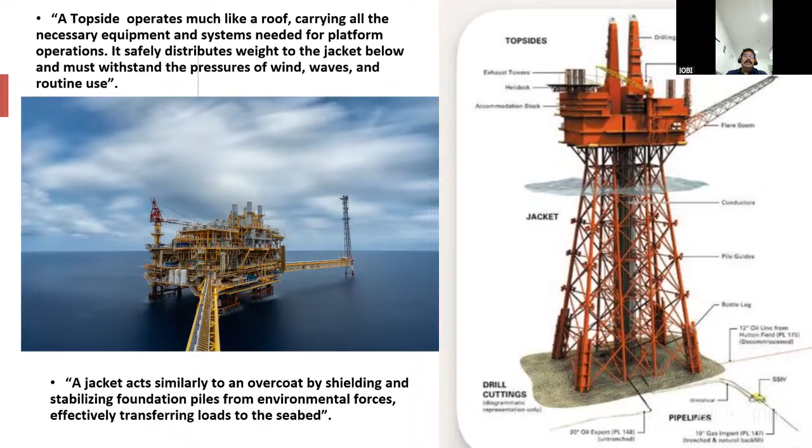So now the question is, what is your role? This is all structure engineer's role. If you look at our core roles, these are structures staying in the sea environment, experiencing all the environmental loads, so they require design to endure many years of sea states. We need to verify sea-keeping properties for 100 years or throughout the life cycle of the platform. Similar to a ship, we need to verify hydrostatic stability and structural integrity, and importantly, establish a practical way to install the jacket and deck.

Jobi, one more question.

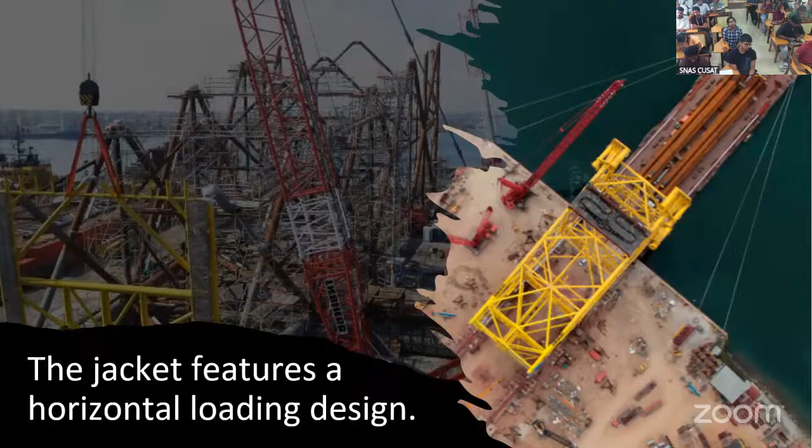Next one is the horizontal loadout jacket. The sequence is the same as previously explained. The jacket is constructed - only thing is there is no headache of uprighting in the yard. It will be directly loaded out onto the barge.

So for the loadout there are 3 processes: one is lift and loadout, other one is trailer loadout, and skidder loadout. Skidder loadout means in the yard as well as on the barge there is a skidding path, and there is a structure attached to the jacket, which the jacket will be sitting on, and that foundation will be skidded onto the barge. So this is the skidding operation - we will see that in the coming slides.

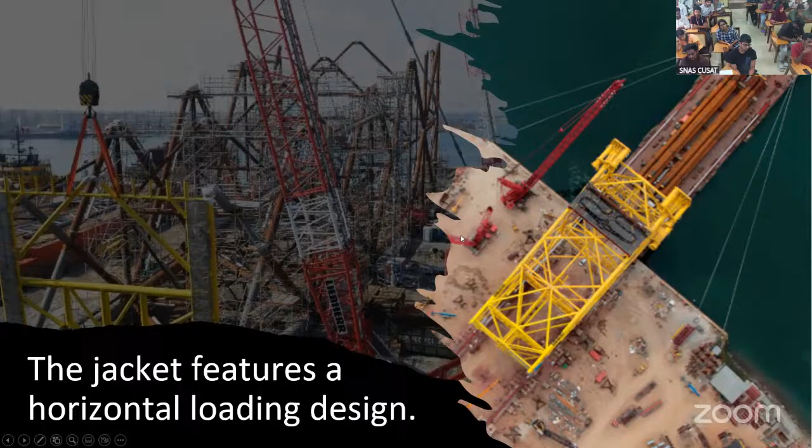We remove all the sea fastening, or prior to that we maintain only minimum sea fastening, and cut the minimum sea fastening once the required trim of the barge is established. Then the jacket is released from the sea fastening and starts sliding towards the aft of the barge.

Can you say what you mean by sea fastening? Sea fastening, or tie down, is a structure which connects the barge and the jacket. It's a temporary structure used for transporting the structure from the yard to the final location on the barge, and it will be removed before installation. So basically it's a securing fastening method to the barge for the transportation.

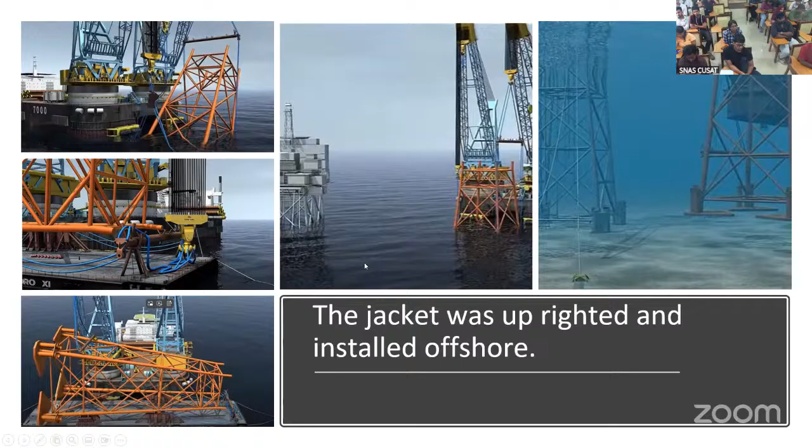You can see on the previous slide, all the rigging is on top. The crew from the installation vessel will go to the top of the jacket, pick the slings from there, and connect them to the crane hook. This is basically designed for lift and place on the water directly, not for launching. From there, the lift design takes care of uprighting the jacket in the water - one hook starts lowering and the other starts rising, so we can bring the jacket upright. It's the same as what we do in the yard, but offshore there aren't many cranes available, so we use buoyancy and ballasting to bring the jacket to various positions until it comes upright.

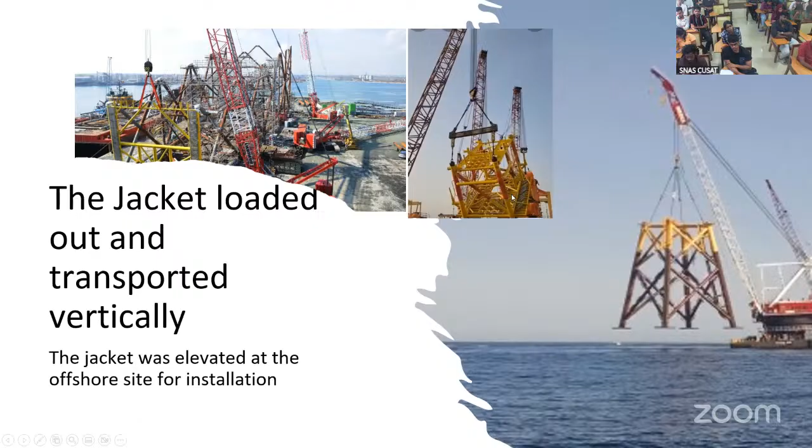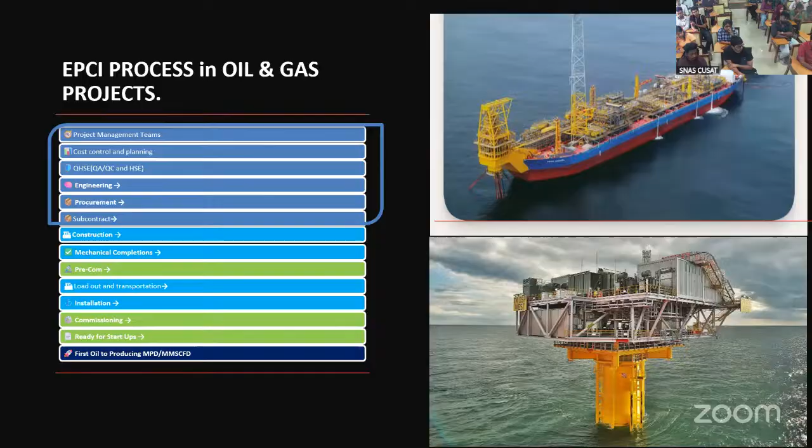One question, please. I'm Harideep from 47th batch. I wanted to know if we use semi-submersible deck carriers for float on, float off in oil rigs. Okay, please go ahead.

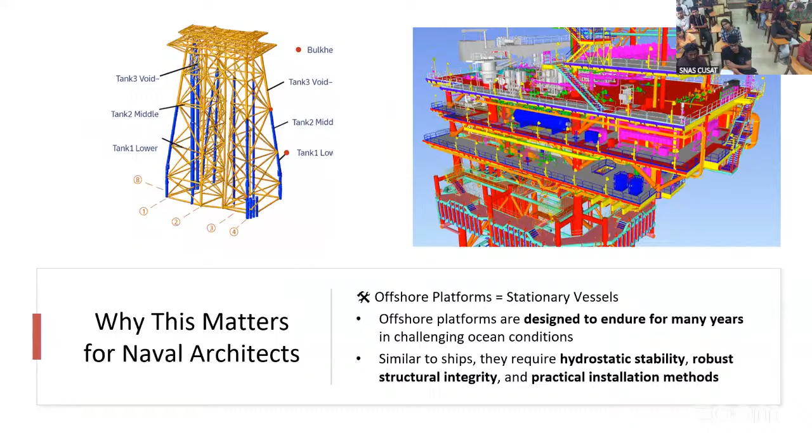Sir, I wanted to know if you use semi-submersible deck carriers for float on, float off instead of using the rails. Yeah, I didn't get the actual question. Sorry sir, semi-submersible deck carriers - can those be used for the operation instead of using skid method?

For the installation? Yeah, there are different methods we install when it comes to jacket. Normally what I have seen is basically using the lift only - all the projects where I worked is lift methodology only. But for the installation on the top side, I am coming to that. I have the slides, we use the float over method. I can explain it in the coming slide.

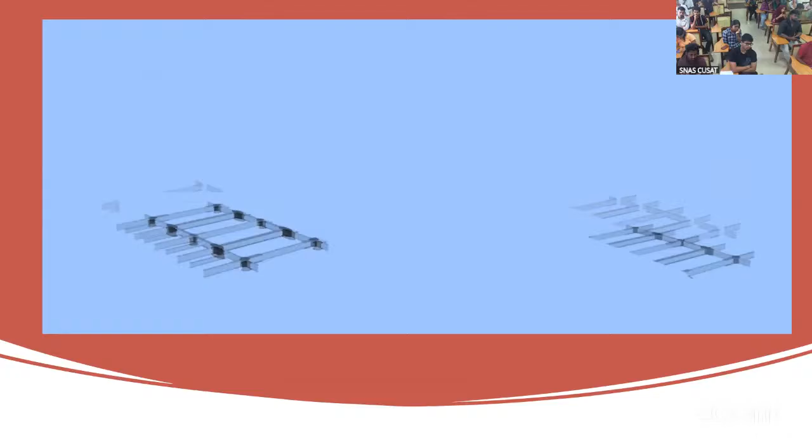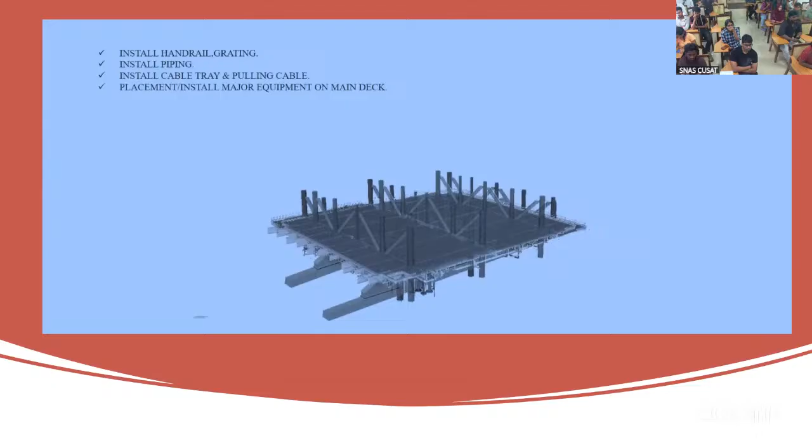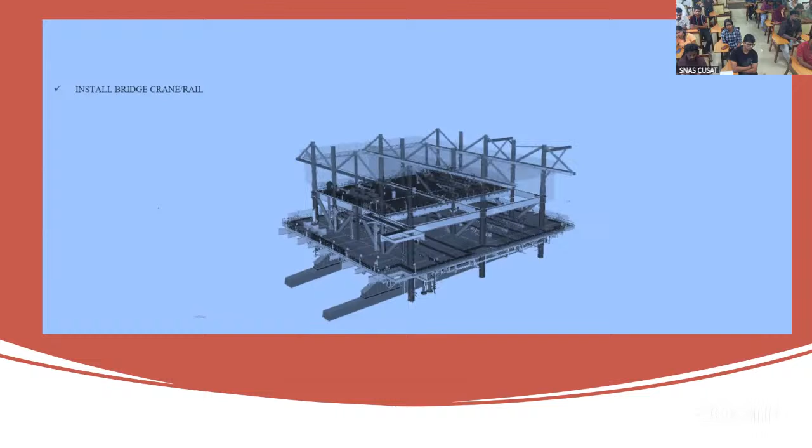So this is basically showing how we are constructing the deck in the yard. These pancakes are already laid on the ground, same like jacket elevations and all. It's constructed in two sections because of the crane capacity to lift at yard and stacking. So you can see the bottom structure is basically for the skidding operation. This deck is meant for the skidder and load out, and the same steps we follow for the next deck levels till the last deck level.

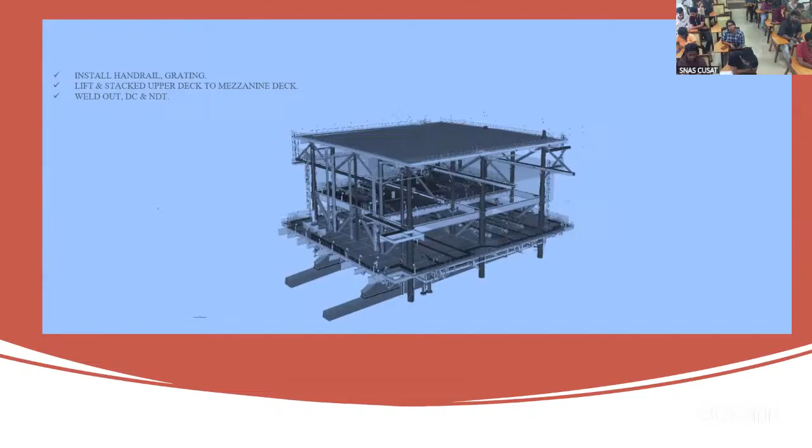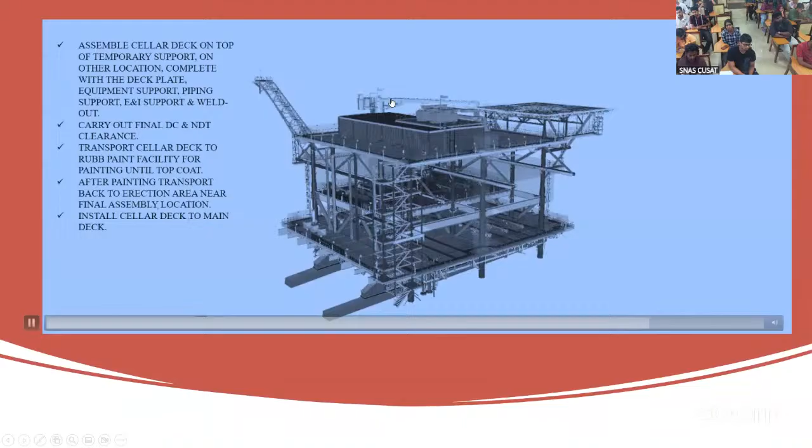So you can go through these details - each deck level will be stacked and structurally integrated. Once the integration is done, we do all the process component equipment installation, and you can see on top this is called the control building. All the equipment which requires temperature controlled conditions, we position it in the building which is air conditioned. So on top of this building are HVAC equipments, which are used to air condition the spaces for the equipment machineries.

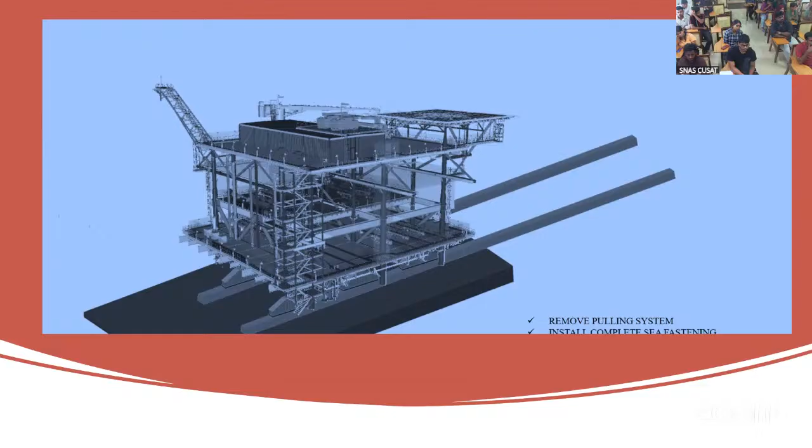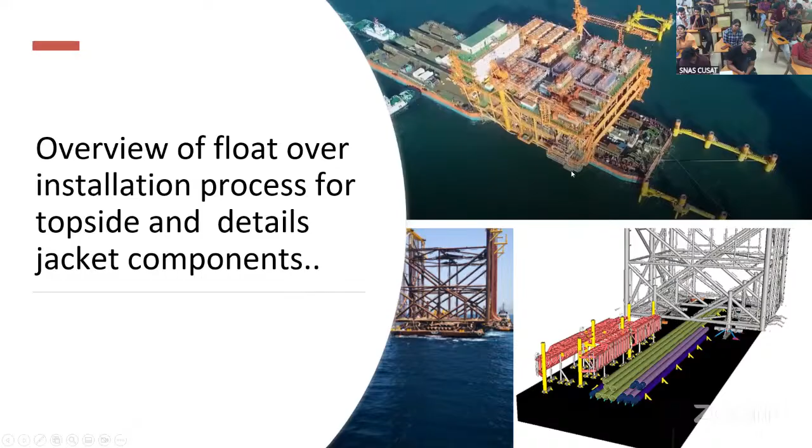So do you have any question? Yeah, in this image, the orange color structure - is that the top side? Okay, you can see the top, next photo will be clear. Yeah, you can see the other photo entry. So the deck has got an overhanging portion.

So if the deck is supported at the mid section of the top side, and there is an overhanging portion, it will go inside, and we do the ballasting of the barge to lower the top side and transfer the load onto the jacket leg and piles. So there is special design hardware that comes into picture, called leg mating unit, which basically controls the load transfer to the jacket till it's finally settled down.

And the entire deck cannot be stiff or fixed there. So after the removal of the sea fastening, like the jacket we discussed, we'll remove it. There is almost a floating support called a deck support unit, which is a sliding surface. The deck will be sliding and free to move and guide to the jacket final location.

So here also we have very heavy involvement, definitely, to do a barge selection. First thing is barge selection for doing this activity. Then we decide the ballasting during the float over, and design of the shock absorbers to not have the impact transfer to the jacket legs and piles, and smooth transfer of the load onto the jacket. So the barge selection itself is a very specialized job here.

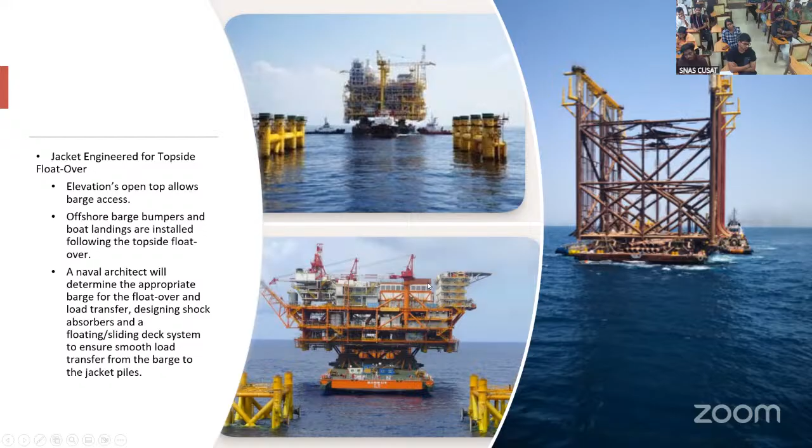Beyond that, we can also start looking at working as a construction engineer, lead construction for the project, and can go up to project manager and project director. We can already see those who passed out from here already started working in various roles for this project.

Another field is engineering, where we can become structural engineers and naval architects for installation engineering. Another area is offshore field engineers, meaning those involved in offshore installation activity, directly supervising or carrying out offshore installation and operations, and installation managers. So same as a construction engineer, operation engineer, and construction manager, offshore installation also has offshore field engineers, operation engineers, and installation managers.

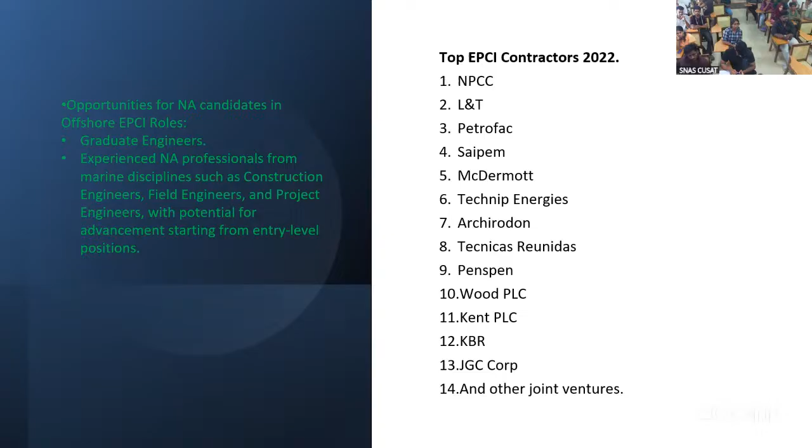So what is the PLC? PMC, I mean to say, is Project Management Consultant. No, PLC. That's something I ought to explore. I'll let you know. Okay, go ahead. That is the name, meaning Wood PLC, just like EPC. I need to find out what PLC stands for.

Okay, so with that, I am happy to take your questions if anything is left out, and the floor is open to your questions.

Joby, if I understand you correctly, in the whole offshore field there are many jobs we can do, but there are very specific jobs which only a naval architect can do, correct? Yes, that is a specialized job. A core naval architect job is already there. But if you look at it percentage-wise, that is maybe 5 to 10% of the project. Not even 5, it's about 5%, we can say.

But my point was, we can always go into other disciplines, but they cannot. Yes, there are cases of non-naval architects training for example in loadout operations and so on. Some people learn through experience working with naval architects and their internal systems, meaning there will be internal procedures and other things. So basically what we learned in college, they allow us to learn and do the job. Otherwise, directly they won't be able to do it. I agree with you.